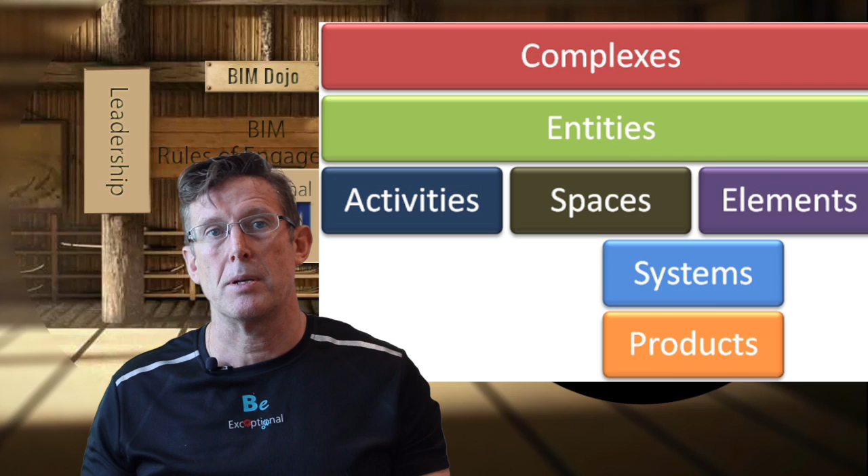There's still many designers out there and other professionals who have not yet understood or grasped the concept of these classification schemas. Yet, they still talk about BIM on their projects. What's the value in that? These schemas are developed to help organize things or objects more appropriately across all sectors of the industry. They're not only a system, but they also define BIM objects in a digital asset. Call it a digital twin if you want.

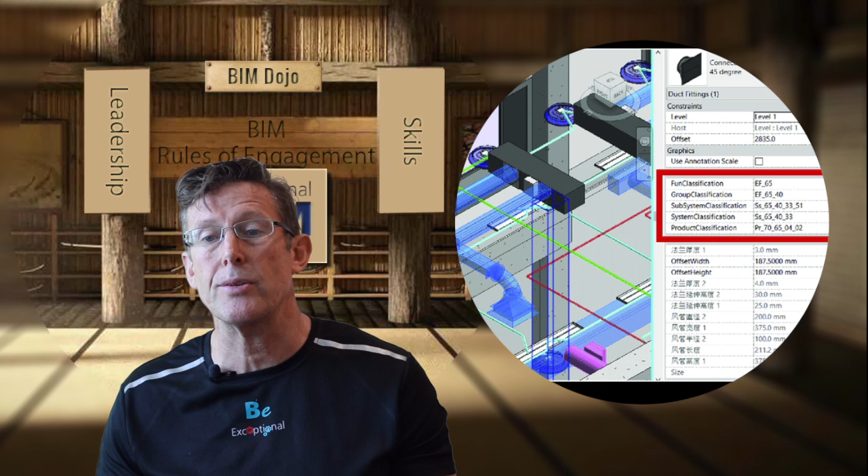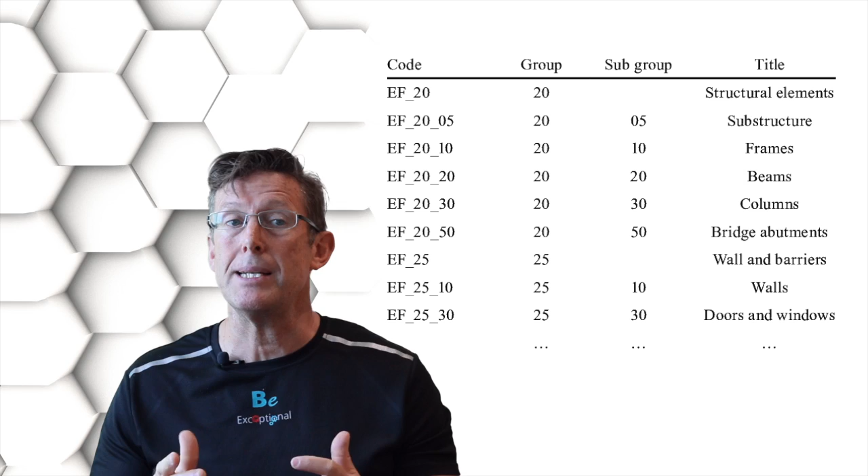By standardizing this information, it simplifies the collaboration between architects, specifiers, contractors, and other suppliers across the team. It also helps estimators and quantity surveyors understand their quantification requirements, as well as their timelines and their feasibility budgets. If we're going to talk about standards, in particular, I'm going to refer to the ISO standard 12006, which is the framework for classification, and it's well known on projects across the globe.

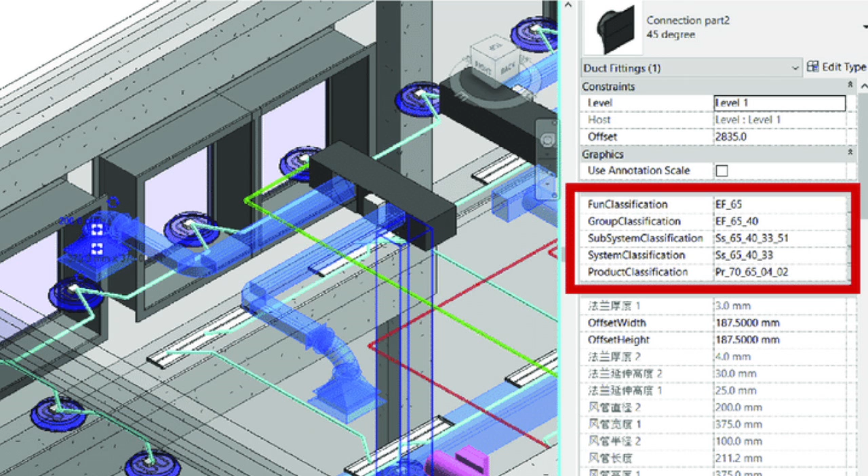One could also define the classification system as an infinite standard that helps systems sort out data as well as objects, so that the other stakeholders on the project can now identify components and make use of the data that's within those objects or elements. In a recent post of mine, I spoke about the finite player versus the infinite player within our construction sector. And I explained the challenges that we face when these two clash within our industry, where I see the technology being the infinite player and all too often people are the finite players.

There's still very much traditionalism or the misconception about BIM within our industry, and it prevails deep down into the different sectors. And each and every one of us is not only fully responsible to understand the benefits of digital transformation, but we also need to understand the needs of others when dealing with this information exchange within projects and beyond. But this rule is not about ignorance or naivety. It's about the importance of understanding how we classify things uniquely, or how we structure information, not simply as a system or an object, but also to understand the classification of information that acts as a functional specification system.

And this helps project teams with other features, such as cross-sector information management, where we combine buildings, geography, and infrastructure. It also helps us manage the full asset management lifecycle when we look at facilities management and the development and the planning of smart city developments. And finally, we look at the integration of cross-sector software systems.

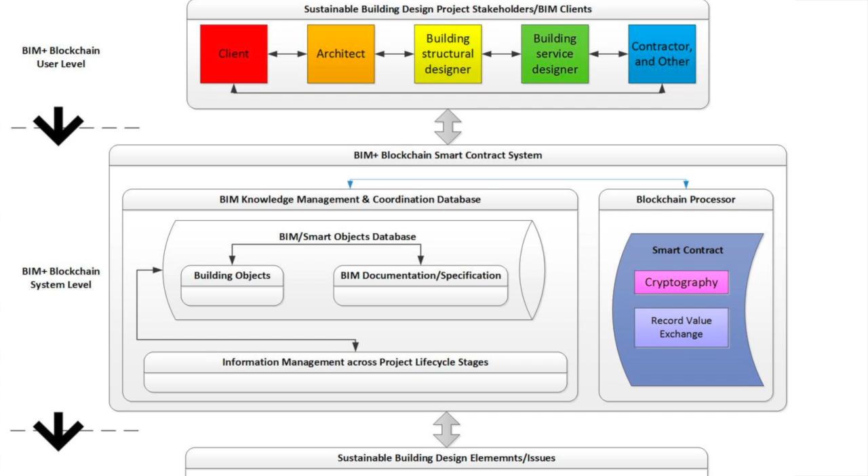Ross Griffin is in Copenhagen, Denmark, and he's an experienced senior cost specialist with a demonstrated history of working in large-scale projects. And as a skilled cost manager, he shares his views on the challenges that he faces when it comes to ticking the box with levels of development and how he has to do cost reporting, procurement strategies, and overall commercial management within a BIM environment. Let's hear what Ross has to say.

I just want to talk a little bit today about pragmatic planning and BIM for quantity surveyors. There's a lot of talk in the industry at the moment about BIM and its development and the progress that it's going through, as well as the benefits that we will see over time from BIM. But I think there's a little bit of a misconception when it comes to quantity surveyors and BIM. We hear from the industry that certain parts or tasks of the quantity surveyor cost manager will be replaced by BIM through automation and whatnot. But let's dig into that a little bit today.

We all know what the LODs, level of detail, are relating to BIM. At the different design stages, we have different LODs coming in terms of the information and the detail within the 3D models coming from the design teams. But while we have and can comply with the LODs, the issues that we have around LODs is the quality of the information relating to the LODs.

This is what we're going to talk about and discuss today: how can we ensure there's quality and value within the design information and the level of detail, the LOD, that the QS can use in order to build their cost plans or bills of quantities or what have you.

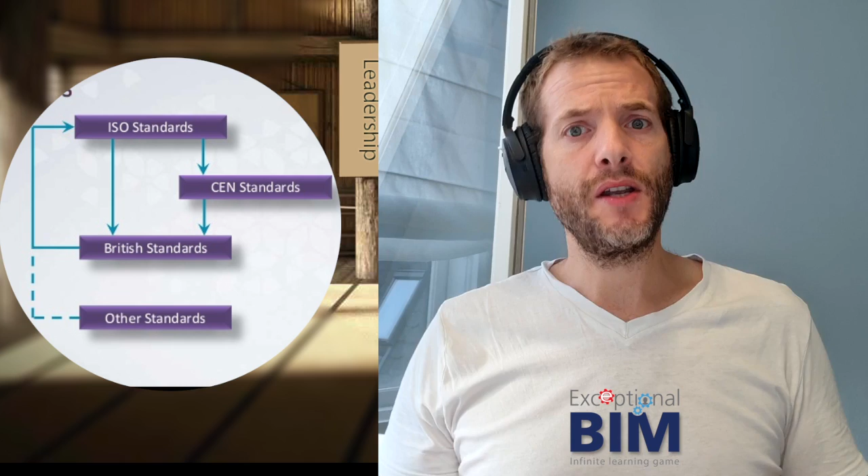Unfortunately, as I said today, the design teams just don't know, and we need to get up beside them and work with them as QSs in order for us to be able to influence the design information, the quality in the design information, and what we believe is necessary to do our job.

A lot of talk is also about the coding structures, Uniclass, Omniclass, these type of coding structures, as well as the quantity surveying standards like ICMS. What is that? How does that fit into this whole BIM world? How does that fit into the design process? Who controls this? What does it look like?

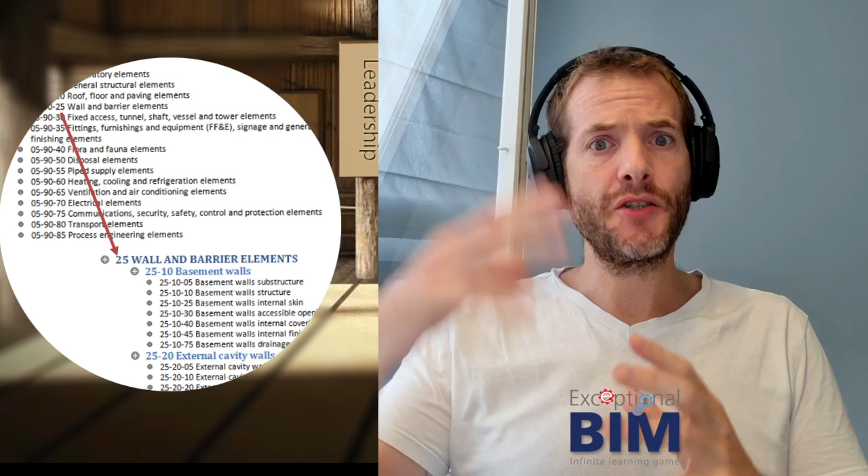And then what we need to understand about ICMS actually is that it's not a quantity measurement and pricing standard, it's just a cost breakdown structure. Only a cost breakdown structure to a certain number of levels, 4 levels. After that, you need to take your method of measurement and pricing rules and then do your quantity extract and build your cost plan and your bill of quantities on top of that.

So that's very important. Today, the RICS and some organizations have mapped ICMS to Uniclass, for example. Albeit while that's very good, that still doesn't give us what we need as an output from BIM as quantity surveyors, because again, that's only a level 4 deep information level.

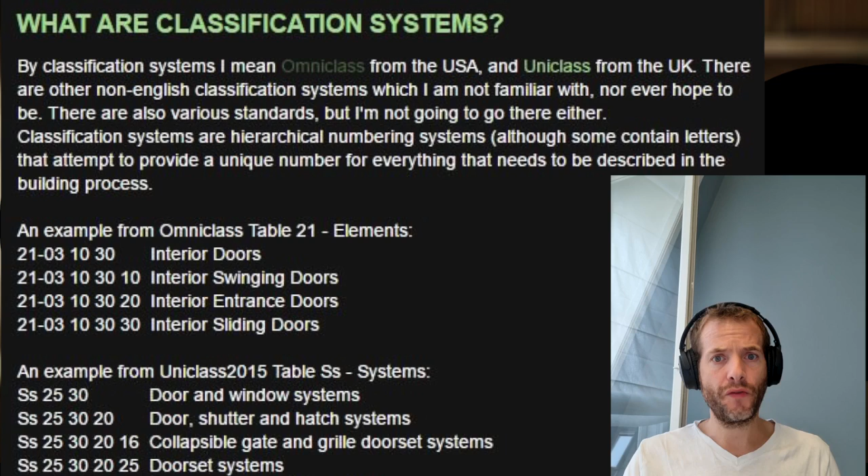So for example, we would be able to identify foundations but not the concrete, reinforcement, formwork, excavation to those foundations, because that's the measurement and pricing rule. So here we begin to look at the different standards that we have and how they're all connected, and are they actually connected.